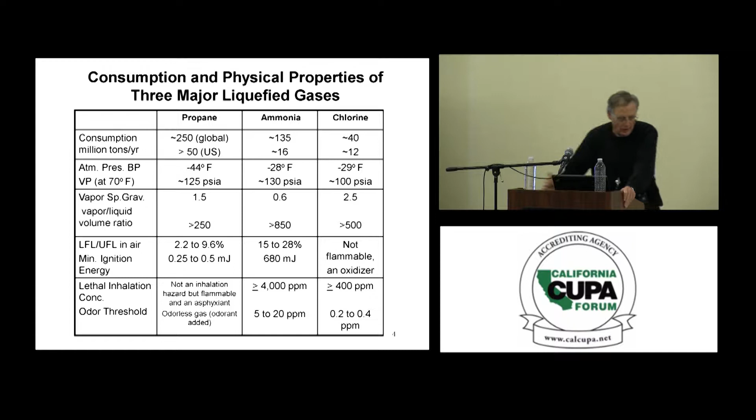The Chlorine Institute is a very good example of an organization that provides a lot of very good information to first responders, to chlorine users, to system designers. And I want to encourage you to go to their website, which I've referenced numerous times in these slides. And I've also shown you that brochure. Now, I don't know if everyone, I think I only had about 25 copies that I picked up from a speech by someone.

I'm going to show you a video that they hand out for chlorine emergencies, an overview for first responders. This is also free from the Chlorine Institute, and I think it's actually distributed through the American Chemistry Council, which the Chlorine Institute falls under. And if someone really wants this badly, I've got a number of these at home, so if you want to come up, if you really want to know more about it and you want to get a copy right today, you can have my copy. I spent a lot of money, it's free.

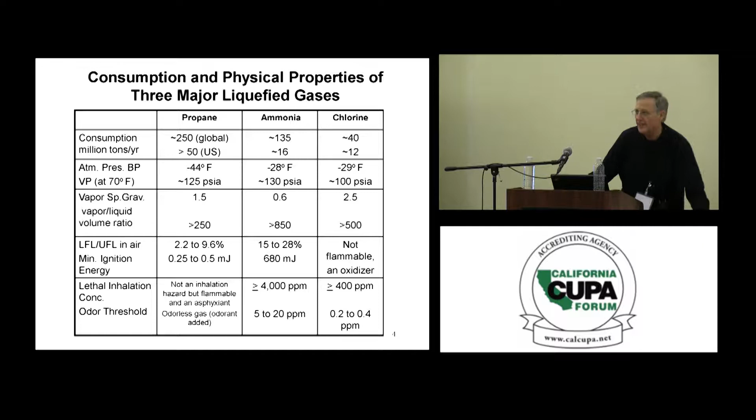Here are some examples of the technical literature. All you have to do is register on the website, download these free as PDF files, and they have a wealth of information about how to install proper piping systems for dry chlorine systems, chlorine vaporizing system, chlorine pipelines, emergency response, first aid, properties, the basics about chlorine.

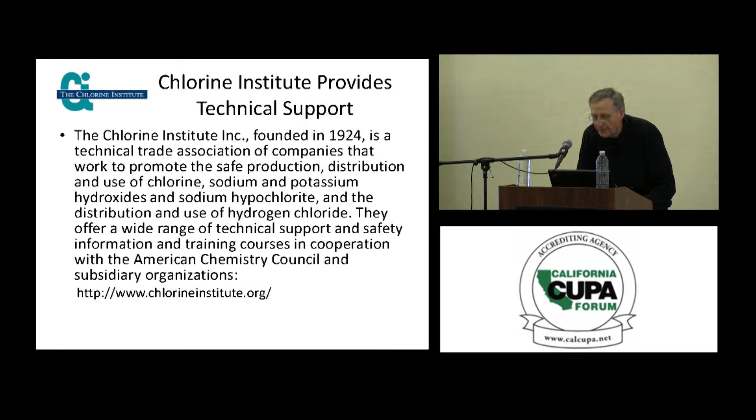There are ones that talk about chlorine scrubbing systems. We're going to talk, one of the examples I give today is about a scrubber that did not work properly. Recommended practices for facilities in terms of how to prevent releases.

And as I mentioned this morning, one of the major roles of chemical engineering when dealing with hazardous materials in process safety is prevention of loss of containment. In your elevator speech, if someone asks you what's the difference between process safety and worker safety, process safety is all about preventing loss of containment through engineering controls and management system processes. And there's a big difference between worker safety and process safety from that respect.

Again, some other things about the Chlorine Institute. The Chlorine Institute also provides information on HCl and anhydrous HCl and on bulk transport and learning from experience events and so forth.

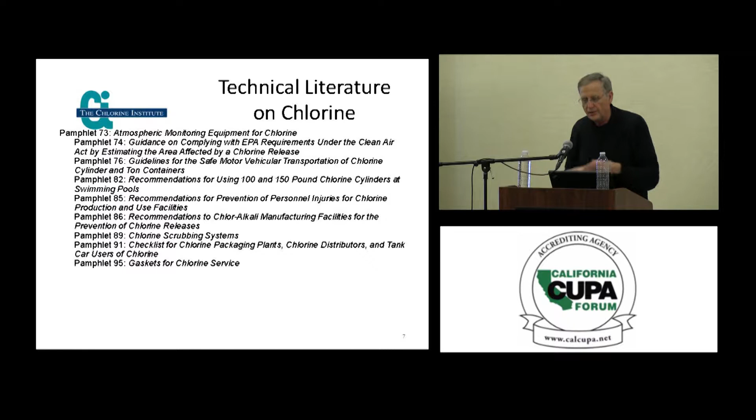So there's a lot of information also for water and wastewater system operators where there's a lot of chlorine used, typically in ton cylinders.

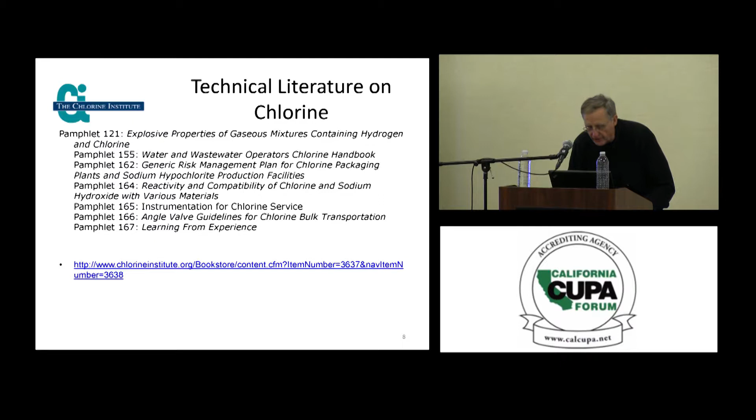So instead of me going over all of this business about properties of chlorine, what I'm going to do is give you an example of what the Chlorine Institute provides on the physical and reactive properties of chlorine.

Chlorine exhibits a very strong, pungent odor that is similar to bleach, but is much stronger. It is easy to detect by sense of smell at very low concentrations.

By itself, chlorine is non-explosive and non-flammable, but it is a strong oxidizing agent that will support combustion with flammable gases and vapors. If chlorine comes in contact with combustible substances, explosions and fires may result.

The most common way for chlorine to come in contact with incompatible substances is through spills, releases, and container failures. Hazardous conditions can also result if chlorine comes in contact with any of these substances. Chlorine reacts readily with many organic chemicals, often violently.

Chlorine reacts with water to form hydrochloric and hypochlorous acid. It is also incompatible with moisture, water, and steam, forming corrosive acids when mixed.

At 483 degrees Fahrenheit, chlorine will oxidize steel, essentially burning it. Chlorine reacts with steel at lower temperatures under certain conditions. Oxidation could lead to a fire, which should be avoided since water cannot be used on a chlorine fire.

Chlorine exists as a gas or a liquid. This chart compares the properties of chlorine gas and liquid. Again, it is important to remember that gaseous chlorine is heavier than air, so it will settle in low areas such as basements, creek beds, and ravines.

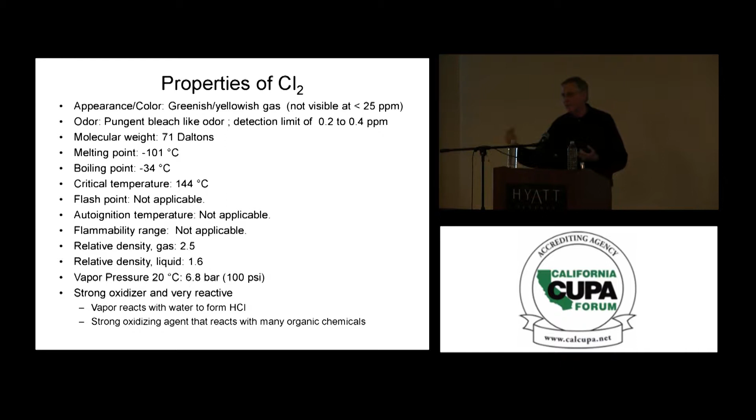So what was the rule of thumb in terms of density relative to air for the vapor? The ratio of molecular weight of the gas to the average molecular weight of air, which is roughly 29.

71 over 29 is about 2.5. So that's a good rule of thumb to remember.

Now, another important point. One of the reasons that chlorine has such great commercial value,

not only because of its chemical properties, but because of the physical property that's shown right there.

Again, for those of you who weren't here this morning, there are certain gases that cannot exist as a liquid at room temperature. And that's because that is above their critical temperature.

Now, chlorine has a critical temperature of 144 C. It's pretty high.

So that means that when you've got a tank car or tank, this is what's inside. A tank's under pressure. It's at 70, 80 degrees Fahrenheit.

It is there as a gas, as a liquefied gas. And that has some advantages in terms of transportation because it's a very dense phase.

Also, it presents some challenges in terms of the hazards, because what happens with a liquefied gas when you suddenly release the pressure?

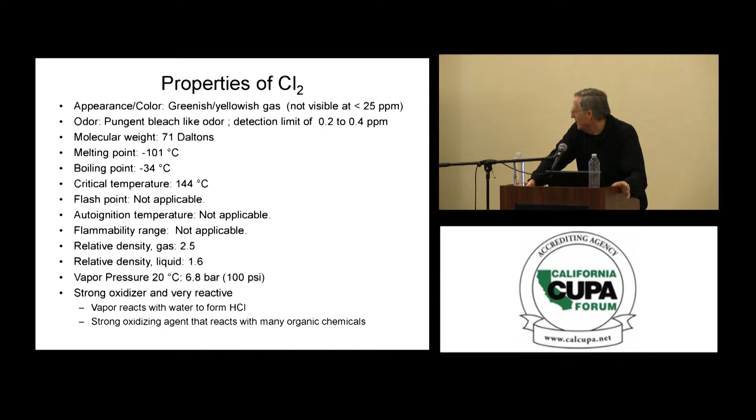It expands rapidly, a very rapid phase transition, and that leads to the condition that's called a BLEVE, boiling liquid expanding vapor explosion. So we're going to talk about that too.

Now, vapor pressure versus temperature. When you have a liquefied gas, if you know the temperature, if you've got that gas container and if the

pressure gauge isn't working, just knowing the temperature, that's all you have to know. And then you look at the vapor pressure versus temperature relationship and you will know what the pressure in that

vessel is. Because for a pure liquid, at any given temperature, it is going to exhibit a certain vapor pressure above the liquid solution.

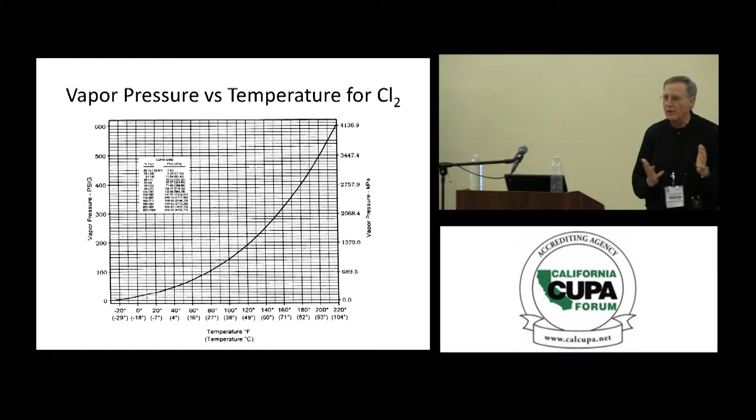Vice versa, if you know what the pressure is, you're going to know what the temperature is, assuming it's in equilibrium. And this has some importance in terms of emergency response at times.

Now, effects from chlorine exposure. Exposure to 1 to 3 parts per million provides mild irritation of the nose and throat and so forth, and the reason for that is it reacts with water and forms hypochlorous acid and hydrochloric acid.

Very corrosive. We're going to be talking about ammonia later. There's an order of magnitude, a factor of 10 difference in terms of lethal concentration between chlorine and ammonia. Chlorine has a lethal concentration - if you get up into the hundreds of parts per million, roughly 400 parts per million, short-term exposure, you will be dead in a very short period of time.

The death is a result of primarily pulmonary edema, but you'll also have other effects as well. As you go up, headache and throat irritation occur at concentrations of 5 to 15 parts per million, and 30 parts per million produces immediate chest pain and so forth.

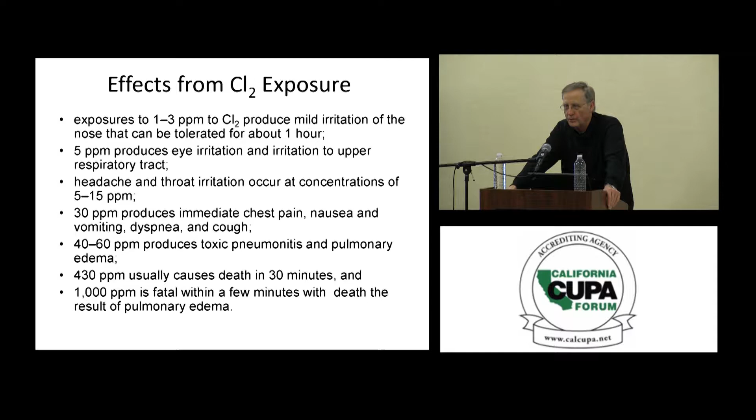So once there's a release, the concentrations can go very high short distances from ammonia or chlorine releases - we're talking about 40, 50,000, 100,000 parts per million. So those are well above the lethal concentration level. So if you get into a cloud, it can be the last thing you will ever do. It's a very serious situation.

Someone want to explain to the rest of the crowd here how IDLHs were developed? Does anyone know the reason for them and the rationale? Are you going to keel over immediately if you're exposed to that level? Close - yeah, that's right.

And so this says immediately dangerous to life and health. This does not mean you are going to die from exposure to that level, but it means you're going to be real uncomfortable, and it will limit your ability to escape, especially with things like chlorine and ammonia that affect your eyesight because of tearing, your ability to breathe, coughing, and respiratory distress. But you will be able to escape at these levels.

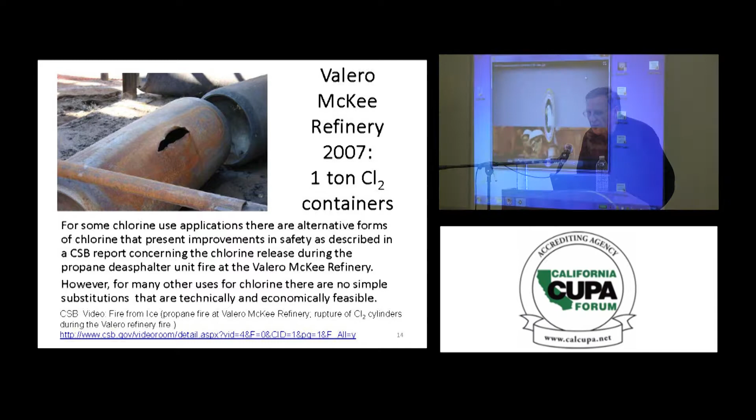And we're going to go 9 minutes in. I had it set to the right spot, but it's not there, but I know where the right spot is.

On February 16, 2007, a massive fire broke out in the propane deasphalting unit at the Valero McKee refinery near the town of Sunray in the Texas Panhandle. 3 workers, including a contractor, suffered serious burns. 11 others received minor injuries.

The fire occurred after liquid propane was released from process piping, leading to fire protection guidance requiring the use of remotely operated shutoff valves and more extensive fireproofing of structural support steel near refinery process units where jet fires can occur.

Valero used chlorine as a biocide to kill bacteria in cooling water. This chlorine was stored in a hazardous area where it was exposed to the threat of fire. Refineries don't have to use chlorine. There are inherently safer chemicals, such as bleach, that can be used for this purpose.

Three one-ton chlorine containers were in a shed only about 100 feet from the deasphalting unit. The intense heat ruptured one of the containers and melted the fusible plugs on all three, causing a release of chlorine. Valero reported that more than 5,300 pounds of chlorine were released to the atmosphere. The toxic gas could have presented a serious threat to responders had they not been evacuated earlier.

A second catastrophe could also have occurred.

Now, it would be nice if there were an easy solution to eliminate elemental chlorine use and use a less hazardous form of chlorine. While that is possible in the case of using chlorine as a biocide—to essentially react chlorine with sodium hydroxide in aqueous solution to produce a solution of sodium hypochlorite, the bleach form—you can't do that in many cases. So it's not an option from a risk management standpoint to eliminate the use of elemental chlorine. So we've got to deal with the hazard.

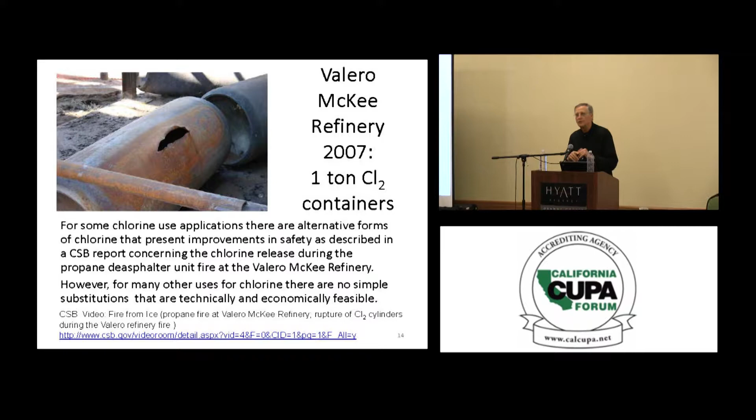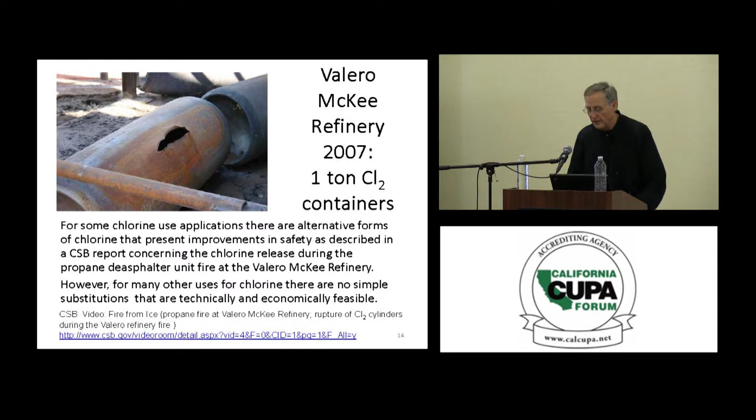We've got to keep that chlorine in the tank car, in the pipeline, in the process, and prevent it from getting out and exposing workers and members of the public.

So how is chlorine transported? Chlorine is a very large volume product transported around the U.S. and used in quantities on the order of 12 million tons per year.

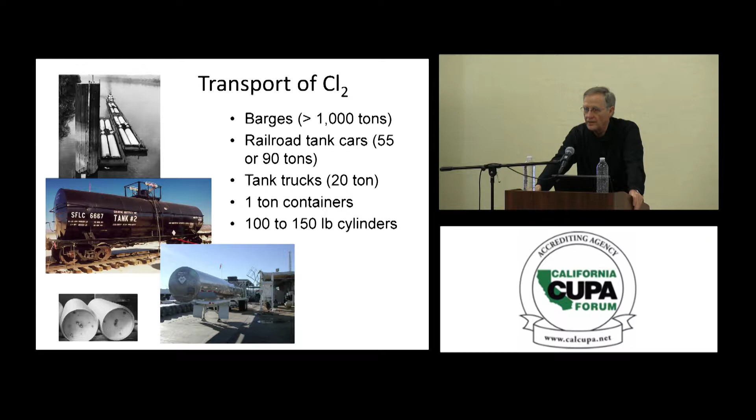Railroad tank cars are a primary method for moving chlorine around the U.S., in 55 or 90-ton tank car loads. Tank trucks also move chlorine, though much less, in up to 20-ton cargo shipments. One-ton containers, as was shown in the McKee refinery fire, and then 100 to 150-pound compressed gas cylinders.

And in those compressed gas cylinders, as in all these cases, it's transported as a liquefied gas.

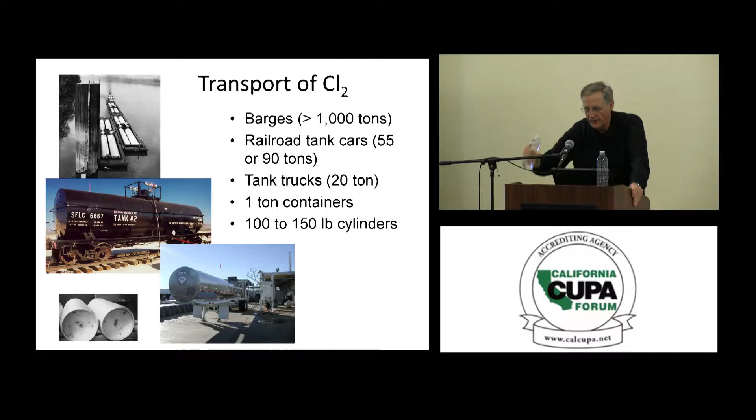So what's the Chlorine Institute say about the industry's safety record for chlorine transport? Well, they say it's been pretty good, and that rail transport is one of the safest modes of chlorine transport. Some 3 million tons of chlorine are shipped by rail annually, typically in 90-ton tank cars. This amounts to over 30,000 tank car shipments a year.

Of more than 1.5 million chlorine tank car shipments since '65, there have only been 11 breaches of tank cars—incidents where chlorine escaped into the air because of damage from an accident. I don't think that includes the minor leaks that occur at the tops of the tanks with the valves. These are very large breaches.

Overall, accident rates for rail shipments of all hazardous materials, including chlorine, have declined 88% since 1980. And remember, I talked to you this morning about some of the changes put in place after the BLEVE incident at the site in Arizona with the propane tank, with the top and bottom shelves on the couplers, and the insulation on both ends of the car having shields essentially welded in place to prevent penetration of the ends of the tank car.

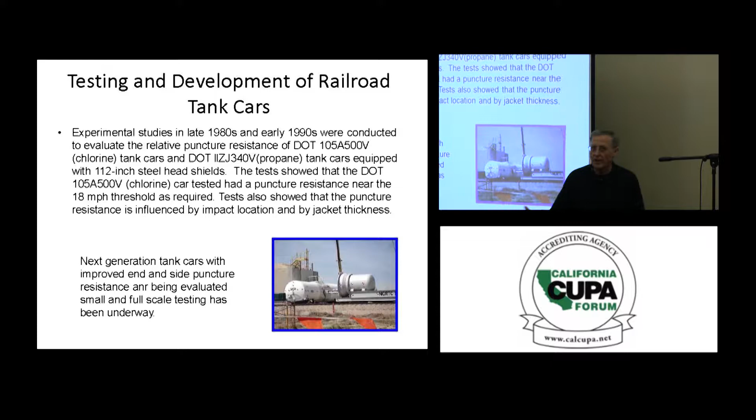As I mentioned, one of the things that happened after some BLEVEs with propane tanks was putting shields on the ends, the front and back ends of tank cars. But what if you have a side impact? If you have a derailment and cars flying all over—I'll show you in the ammonia discussion such an accident—you can still get side penetration. So there's work underway looking at how to improve overall performance.

Studies done in the late 80s and early 90s showed that many of these tanks can survive accidents where there may be a decoupling and penetration of one of the couplers through the insulation, but they can still survive at 18, 20 miles per hour. Higher than that, maybe they won't. So they're looking at how to better design these tank cars.

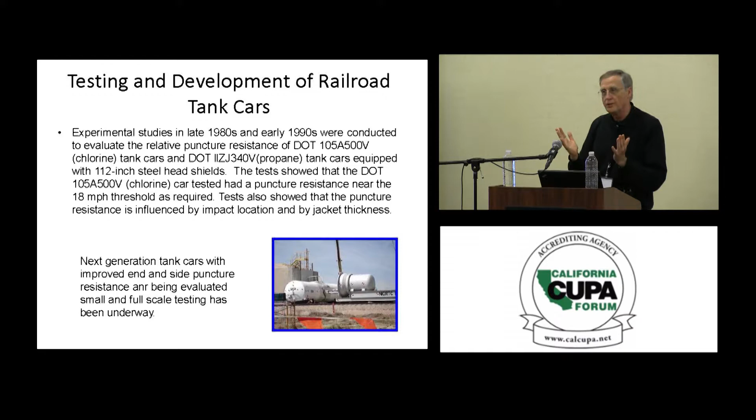Now, will that be a quick fix? What's the lifetime of a tank car? These tank cars aren't automatically replaced when a new standard's put into place. So it takes years to often turn over the inventory of what's out there running across the rails. We've had some big improvements in the last 30 to 40 years in terms of BLEVE incidents, but there's still some improvements, and people are working on these kinds of issues.

So let's talk about in the supply chain—we're going to be talking about from production through distribution, distribution centers and so forth. Where do accidents occur? One large release happened in Henderson, Nevada in 1991 at a chlorine production facility run by Pioneer Chlor-Alkali. At this incident, they released roughly 70 tons of chlorine, which is equivalent to what is typically in a railroad tank car. This happened in May of 1991.

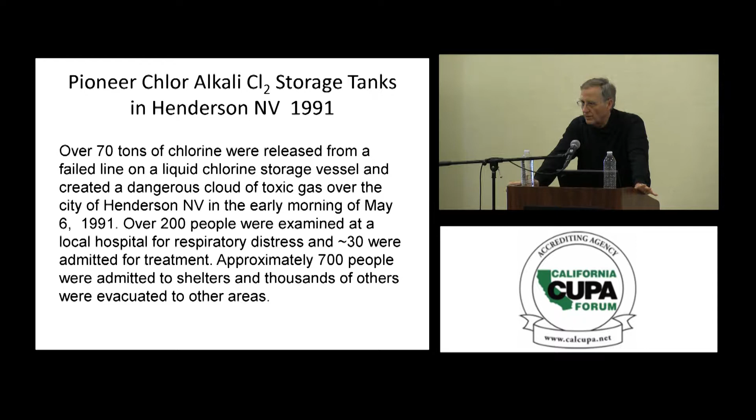There were quite a few people who went to hospitals. 30 were admitted for treatment. Luckily, no one was seriously injured and no one died from this event.

At the facility, they had 8 150-ton storage tanks, and what happened was they had a line leading from a tank going to a pump that was used to fill railroad cars. In other words, this was a production site. They produced chlorine, these tanks were used to store product, and then they would fill rail cars and ship rail cars out. This was probably the source of chlorine for much of Southern California, I would guess.

There were a number of issues with this in terms of how the employees assessed the situation, how quickly they responded, and how they notified the authorities and interacted with them in addressing the issues. They very much underestimated the severity of the situation, and it got out of control. They thought they had it under control several times, and they probably did not have a good mechanical integrity program. They did not have good emergency planning.

They weren't prepared to deal with the issues they should have been able to deal with in a much more effective manner, and shut down the flow before it got to the situation where, over a period of 24 hours, they lost 70 tons of material.

Now, what could the consequences from a 70-ton chlorine gas release be in a metropolitan area? There have been numerous studies done, with numbers anywhere from 10,000 to over 100,000 fatalities. This is real serious—it could be a major catastrophe.

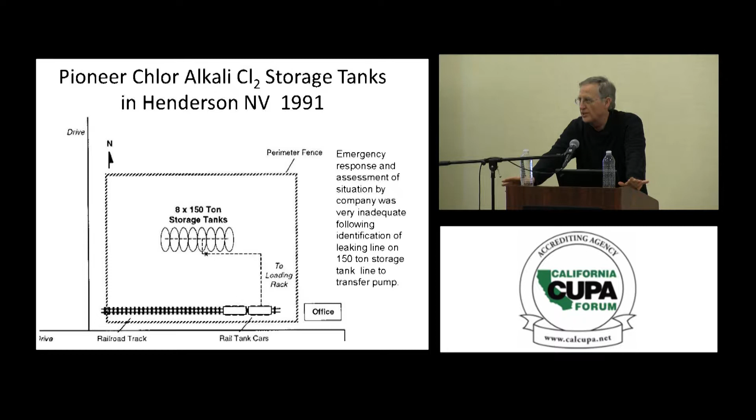Railway tank cars carrying 70, 90 tons of chlorine can potentially have those kinds of consequences. That's why I want to come and talk about these issues, so we never become complacent with these kinds of hazards. As a society, as an industry, as a chemical industry, we have a very good record in managing these risks. It's not perfect, and we need to continue to try to get better.

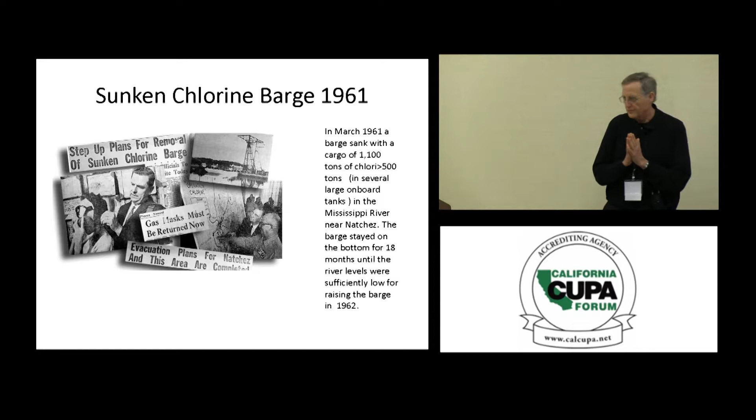Finally the President ordered the Corps of Engineers to work with a number of other groups, and they raised this barge successfully. During this whole process, they provided the public with something like 8,000 or 10,000 gas masks in case these tanks failed when they were removing the chlorine from the barges. So again, this is a success story in that these tanks survived the sinking, the raising of the barge, and then unloading. Good engineering design. Or were they lucky? Hopefully it was good engineering design.

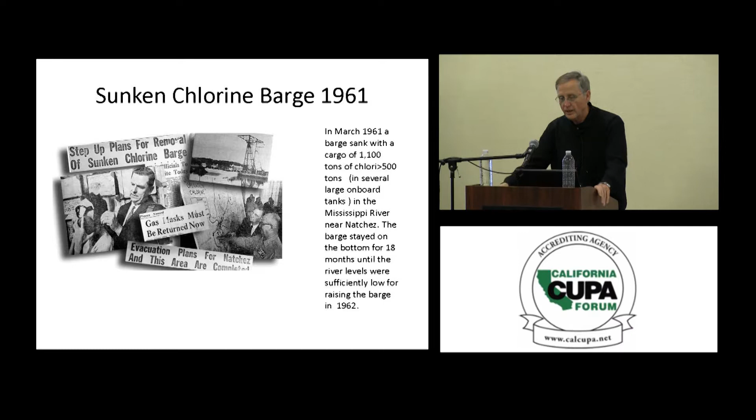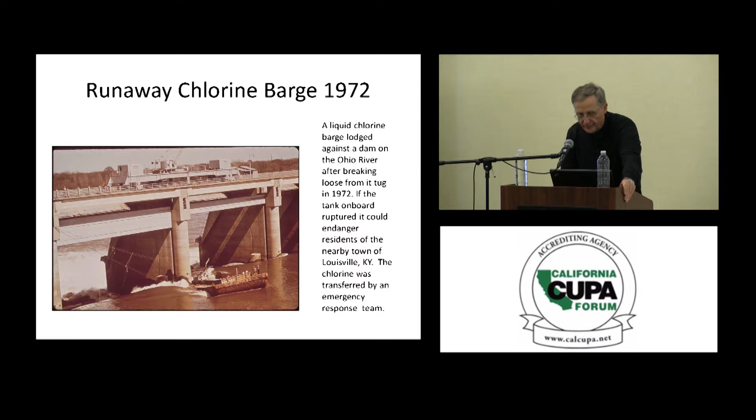2004, Macdona, Texas, June 28th. Head-on collision of two trains resulted in a chlorine tank car breach. Three persons, including the conductor of the UP train and two local residents, died as a result of chlorine gas inhalation. We've got to keep it in the tank. Loss of containment.

The National Transportation Safety Board determined that the probable cause of the June 28, 2004 collision of the Union Pacific Railroad train with this other BNSF railway train was train crew fatigue that resulted in the failure of the engineer and conductor to appropriately respond to the wayside signals governing movement of their train.

Now, in the discussion we had this morning of the propane incident in Italy at night, remember what I said when they did the modeling after the incident? From the time the collision occurred and the derailment until the explosions occurred, 90 seconds of time, and 30 people were dead.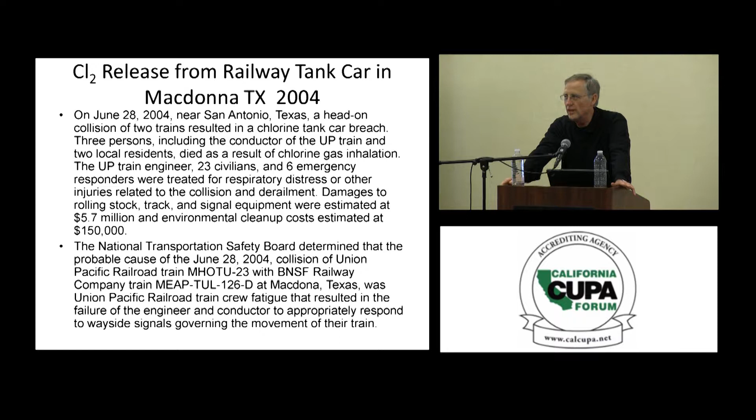There's not much time to react, so there are two types of safeguards we talked about: preventive and mitigative. Preventive safeguards, typically engineering controls, are intended to lower the probability of release. Mitigative safeguards are intended to reduce the severity of consequences. In these kinds of transportation accidents, we don't always have a lot of time, depending on where it happens, to mitigate. So prevention is what we've got to focus on.

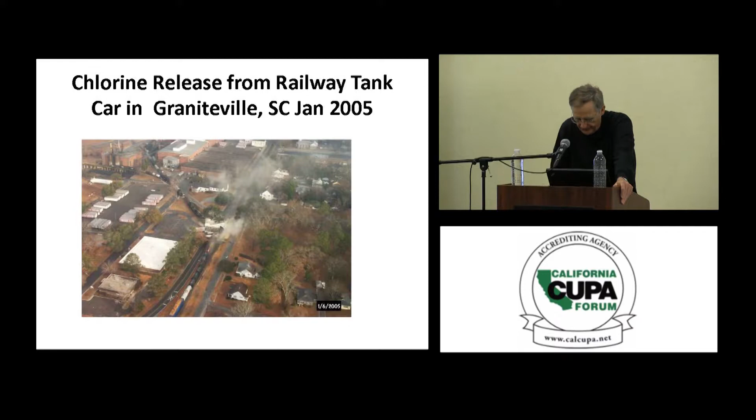Graniteville, South Carolina, January 2005. A misplaced track switch resulted in a collision between a railroad tanker carrying chlorine and another parked train. One of three derailed chlorine tank cars ruptured, venting 90 tons of chlorine gas. 41 were hospitalized, 9 fatalities. We're lucky it was only 9. Could have been 9,000.

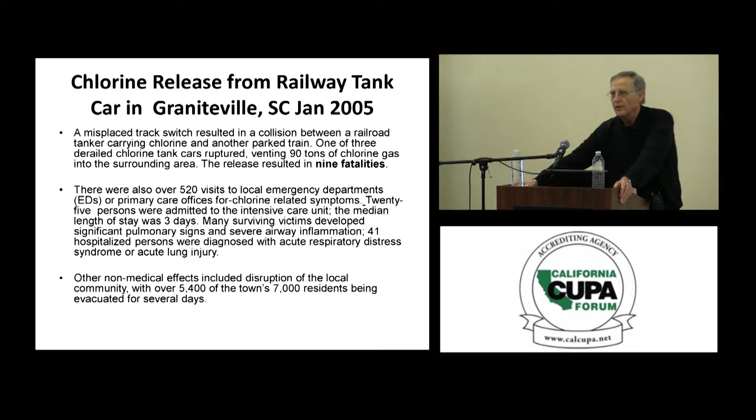Many surviving victims developed significant pulmonary signs and severe airway inflammation. 41 people were hospitalized with acute respiratory distress syndrome. I'm not certain in this case what that extent means, but acute respiratory distress syndrome usually means you go on a mechanical respirator for 24 to 48 hours, and if you make it that far, you may survive. But this is a very serious type of event when these happen.

Close call, August 2007. Operator error caused a Union Pacific tanker car full of chlorine, probably 70 to 90 tons, to escape from the Arden train yard near Las Vegas. Although no toxic gas was released, the tanker car traveled 20 miles on its own through densely populated areas before railroad workers and police were able to stop it.

Based on prior estimates by the University of Nevada and numerous other groups, I've seen these numbers ranging anywhere from 10s of thousands to 100,000 could have died.

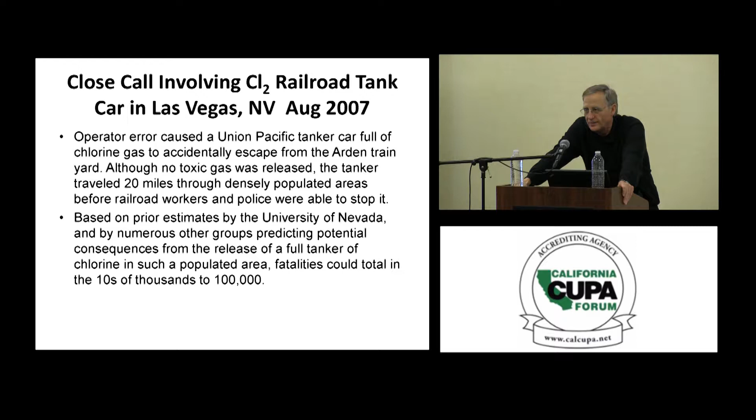Now, this isn't a transportation accident. This happened after the tank car got to the siding. In the case of chlorine transport and use, many facilities that utilize chlorine on site may use the tank car as their storage tank, or they may keep multiple cars there for some period of time in their inventory. DPC Enterprises in Festus, Missouri had this incident in August of 2002.

This morning I talked about the four steps in a risk management business process. The first step is identifying the hazards and knowing what hazards you have. The second is to evaluate those hazards in terms of consequence analysis and probability of events, to come up with some risk rating. Based on that risk rating, you take actions in terms of implementing risk controls. That's the third step. If you're then satisfied that the risks are tolerable, you implement and maintain those controls.

If you're not satisfied, you iterate back, look at other control options, and once you're finally satisfied, then you go and operate the facility.

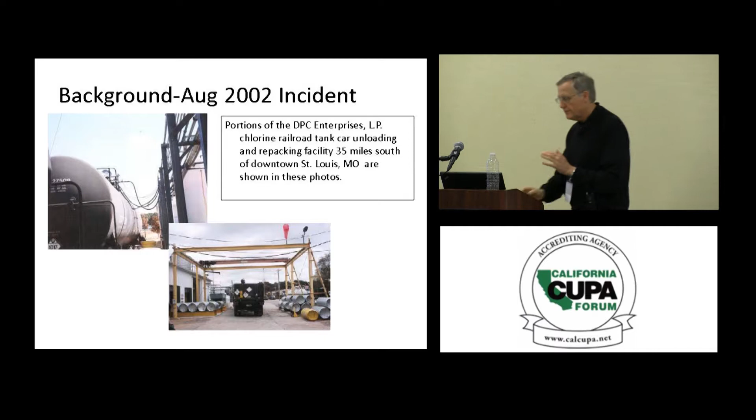So these folks had some level of appreciation for the hazards they were dealing with, but they probably weren't real savvy. It's a 1-shift operation, typically running from 6 a.m. to 4 p.m. Monday through Friday.

This was located 35 miles from St. Louis. One of the fellows I teach this process safety course with was at the time the lead investigator for the Chemical Safety Board and actually did this investigation, so he's told me this story many times.

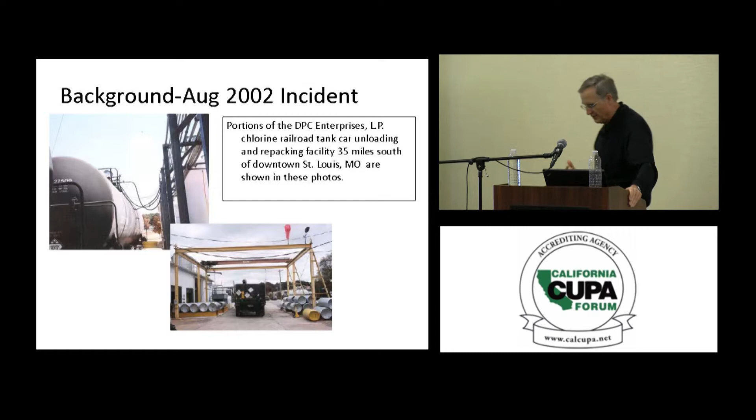DPC had learned from past events. One of the things we talk about, learning from experience, is one of the key elements within a management system. Again, these folks had that part right.

They said, gee, there have been a lot of other companies in the chlorine business who have had accidental releases. So we're going to put some safeguards in place so that if we have a release, or a failure of one of our flexible hoses, or an accidental decoupling of our fittings for the transfer, we're going to be able to automatically shut down. We'll lose a little chlorine, but it's not going to be a big deal.

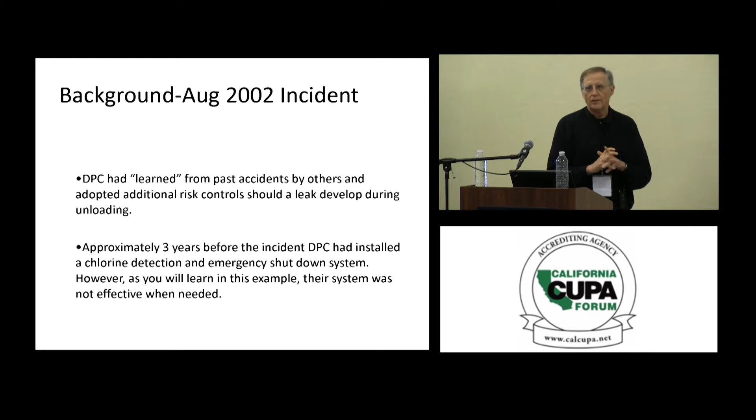So they went along and thought everything's great. We've got all the controls in place.

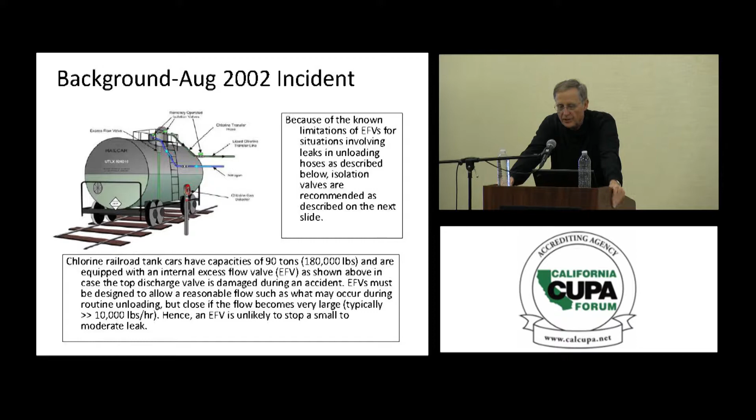Now, what they had done, because of the known limitations of emergency flow control valves for situations involving leaks in unloading hoses—excess flow valves is what I meant, excuse me, I said emergency, it's excess flow valves.

Tankers that carry hazardous materials like chlorine, propane, or ammonia have internal valves that, if the flow rate reaches a certain level, will automatically shut, or at least close to a very low flow level. However, they have to be triggered.

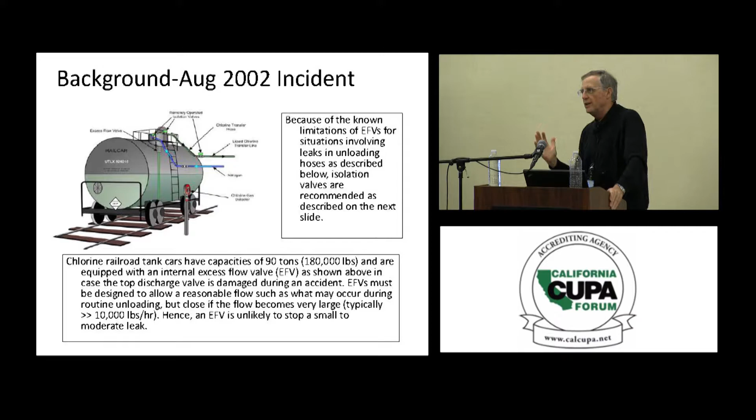In the incident I described with the video this morning, in Iowa, for that 18,000 gallon propane tank, they had piping connected to the outlet protected by this excess flow valve that restricted the flow so that it would not close the excess flow valve. So you cannot depend on these excess flow valves.

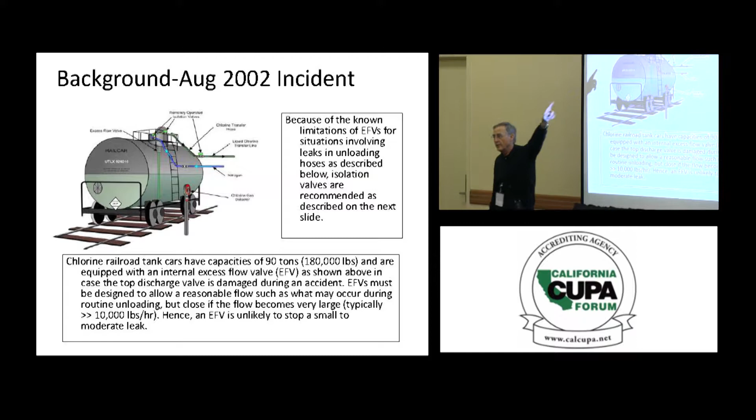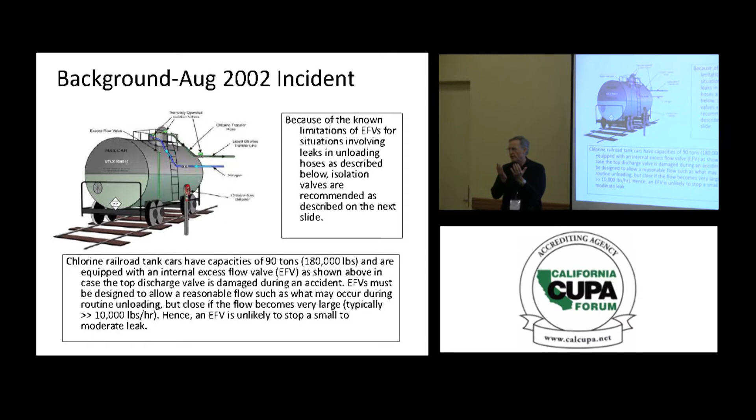What these are designed to do is: if you have a rollover incident with a transport tank like this, you've got this shield on top that protects the external valve, and under that valve is a second valve. So this is engineered with double jeopardy—you lose the top valve, you've got another valve, so you'll start getting flow, it'll be high flow, and this other valve will automatically shut. But it has to be a high flow in order for it to work.

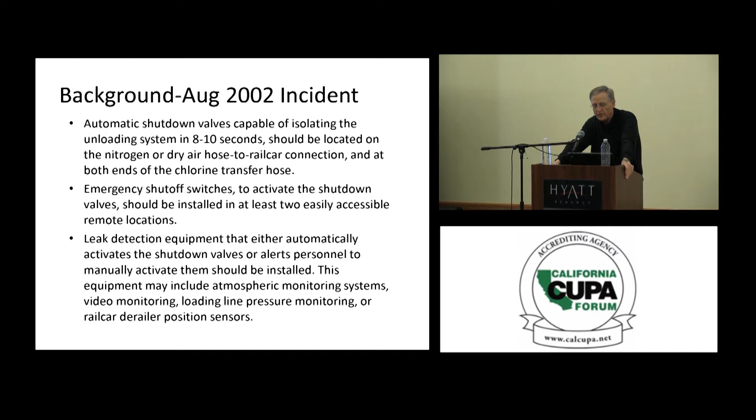So what did they do? They had this automatic shutdown capable of isolating the unloading system in 8 to 10 seconds. Emergency shutoff switches to activate the shutoff valves should be installed at least at 2 easily accessible remote locations, and leak detection equipment that either automatically activates the shutdown or alerts personnel to manually do it. So they had all this in place.

They also had transfer hoses. These transfer hoses were braided metal layer over a Teflon inner liner with a spiral high-density polyethylene guard. Although hoses with non-metallic cores, such as Teflon, are more tolerant of moisture, they are subject to permeation by chlorine.

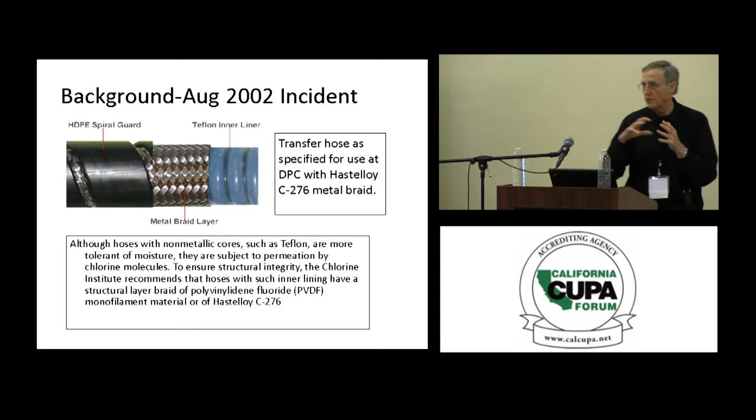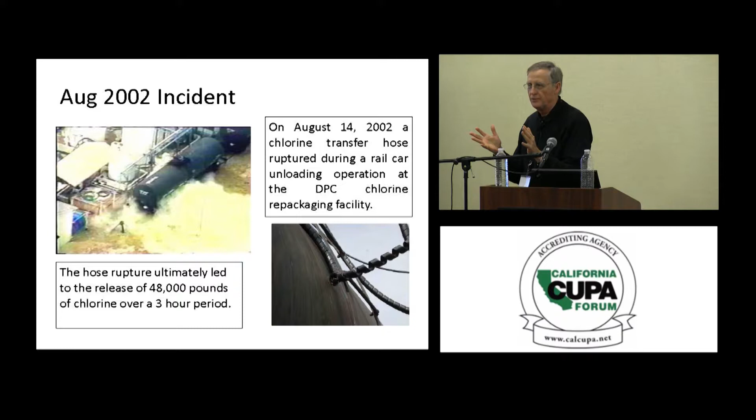Now, what actually happened? One of these hoses failed. The automatic shutoff was supposed to shut this down within 8 to 10 seconds—they should have lost only pounds, tens of pounds, of chlorine in this release. Instead, they released 48,000 pounds over 3 hours. How did this happen?

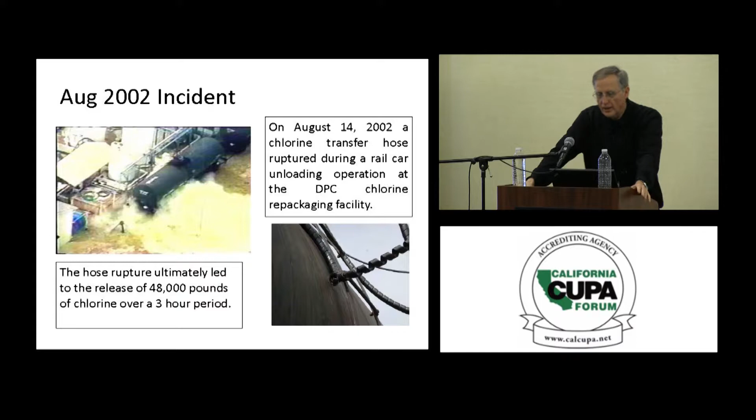The release affected hundreds of other nearby residents, and the community was advised to shelter in place. Luckily, this was in a relatively low-density inhabitation area. Traffic was halted on Interstate 55 for an hour and a half, which pleased a lot of people. And 3 workers and 63 residents had to seek medical treatment for minor injuries, but they were luckily minor.

During the initial response to the release, there was considerable confusion. Plant staff did not have instruction and mechanisms for community notification. It was chaos, and local emergency response personnel were not prepared for an incident of this magnitude.

Remember, one of the things I mentioned this morning that is not under OSHA PSM or EPA RMP plans is stakeholder outreach. If you are an operator, it is your responsibility to have community outreach, to make certain that first responders know what the magnitude of the hazard is at your site and how to respond to that emergency in cooperation with you as the owner-operator. It is also the responsibility of you and the regulatory community to understand these things, and if they do not volunteer, that you go out and work with them to make certain that you understand what these hazards are.

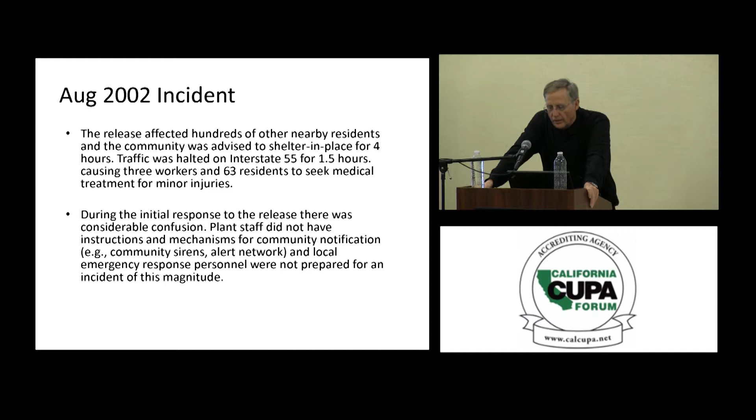Turns out that with these braided hoses, investigators determined that although the hose manufacturer's records and the hose ID tag indicated that the metal braid on the failed hose was made of the specified material, Hastelloy C, it was actually made of stainless steel, which looked exactly the same. So this was a manufacturer's error in terms of quality control, and there was no internal control to make certain that the material as received met specifications.

And I'm guessing that none of the 8 or 12 employees at this site even knew the difference between Hastelloy C and stainless steel, and probably furthermore didn't even know that there was a standard for what they should be installing with that hose.

Should they have known something about that? Yes, they should have. Should the corporation have had a quality control system in place? Absolutely, they should have.

What would that quality control process be if the hose that they received was marked as being made in Hastelloy? Should they test the metal in all their hoses, or what is their process? What would that process be? It would have to be put back, the responsibility would have to be put back on the original supplier.

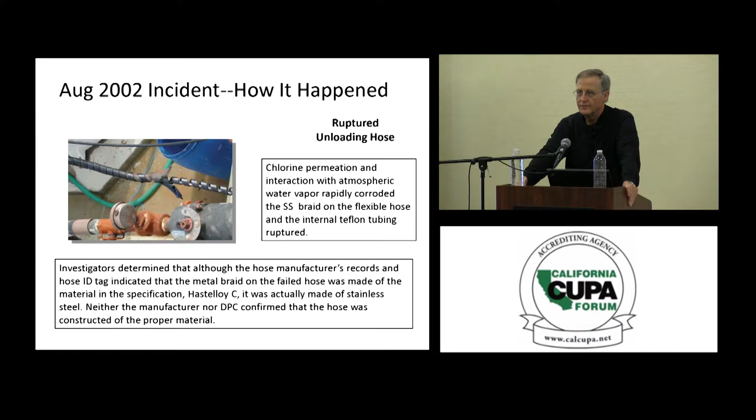I'm not going to go into the details of exactly how this failed. There's a lot of engineering details why there were other problems with this system.

Now, on the day of the incident, even though the chlorine detectors detected the release and the operators pushed the shutdown button, so they had been trained on doing that. My colleague, who actually did the investigation, went out and asked the operators, do you do routine checks on the system? Oh yes, we do it all the time. How do you do those checks? Well, we push the button and listen for the solenoid. Well, the solenoid was actuating, but it wasn't moving the valve mechanism.

So what they were doing, remember I said there's a 4-step process, the last one in mechanical integrity is doing inspections, testing, calibration, and maintenance to make certain that safety critical systems, including those for emergency shutdown, work as designed and specified. So again, they were doing it partially right. They'd put in controls, they were testing them, but their testing was faulty. They weren't actually verifying that they were working. They thought they were working, they were not.

So we had lack of quality control, we had a lack of effective inspections, lack of adequate testing and maintenance by DPC on chlorine transfer shutdown control valves to ensure that the systems worked. Now in the next segment, a very similar system to this in France on an ammonia system also failed for a different reason. We'll talk about that in the next couple hours.

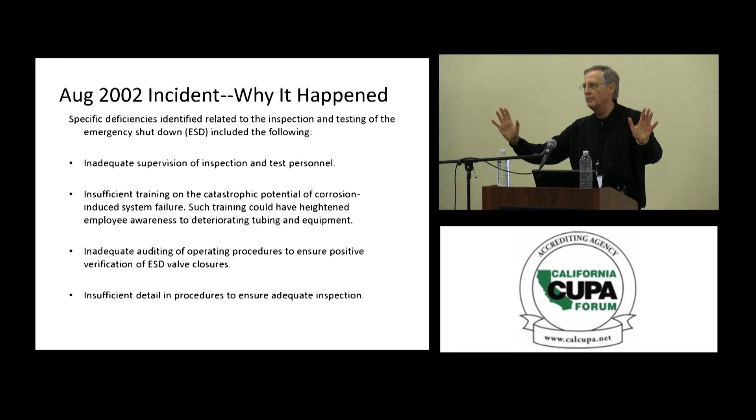Failure of a hose, right? Same thing, flexible hose connected to 1-ton phosgene cylinders. They had a maintenance requirement as part of their management system for process safety. And here is a company that I personally have held on a pedestal for years and still do, as being a great company in terms of process safety. But even a company as responsible, as competent, with as good a track record as DuPont has, had a fatal accident with phosgene because of failure of a management system.

Go to the Chemical Safety Board website, and there's a video on this incident that talks about the failure of this hose. This hose was supposed to be replaced on a monthly basis. They switched from Maximo to some other management system and maintenance. They switched over, and the hose had not been replaced for 7 months. It was a situation where they'd also looked at alternative controls and didn't implement them for a variety of reasons. Series of management system failures or deficiencies that led to a fatal exposure.

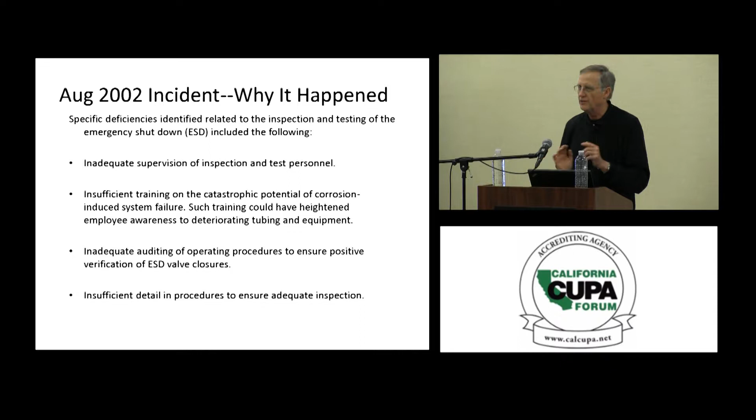Roughly 1 to 2 pounds of phosgene was released, and the fellow who was walking by when that release occurred, he was about 5 to 10 feet away from that hose. Just by chance happened to be there.

With phosgene, chlorine's not exactly as phosgene. The impact and the consequences may not be well exhibited for 3 or 4 hours. So he appeared to be fine initially. 4 hours later, started to suffer from severe fluid in the lungs, and he was dead in 24 hours.

So these are some of the issues. And again, for those of you who weren't here, OSHA process safety management standards for management systems requires the owner's process knowledge. They call it process information. In this list of 20 elements under risk-based process safety, we like to call it process knowledge. To convert process information by having process safety competency into process knowledge, to make knowledgeable decisions about risk.

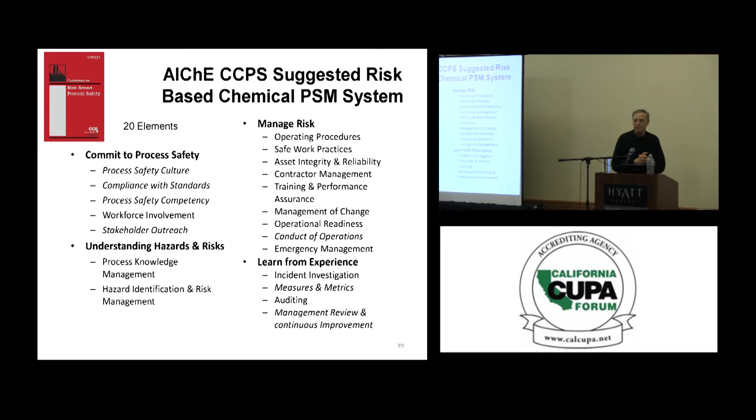They also, asset integrity and reliability, training, compliance with standards, and making certain that if you had an internal standard to have a Hastelloy jacketed hose, that you in fact have Hastelloy jacketed hoses. And when you look at what are the costs, is it expensive, is it time consuming, is it a pain in the neck or worse, to do that, yes it is. But it's a lot less of a pain than to deal with a 24-ton release of chlorine gas or a release of a couple of pounds of phosgene that can kill someone.

Chlorine release, another DPC facility in Glendale, Arizona in 2003. Release of chlorine from a scrubber that had insufficient caustic. 5 local residents and 11 policemen treated and released for exposure. Luckily, no one was killed.

Now, this is an example of lack of process safety competency on the behalf of the corporation, not having adequate management systems in place, not doing adequate hazard identification, not fully understanding the process in terms of potential consequences. They had not done an adequate analysis when they did hazard identification and risk management of looking at what the potential consequences are.

Remember when we talked about, at the earlier session, about propane, those releases and other types of hydrocarbon fuels, and when you look at consequences, are we going to have a jet fire? Are we going to have a vapor cloud explosion? Are we going to have a release of multi-phase and have a fireball? What kind of fire scenario do we have to plan for? In this case, they did not do this kind of analysis for what might happen.

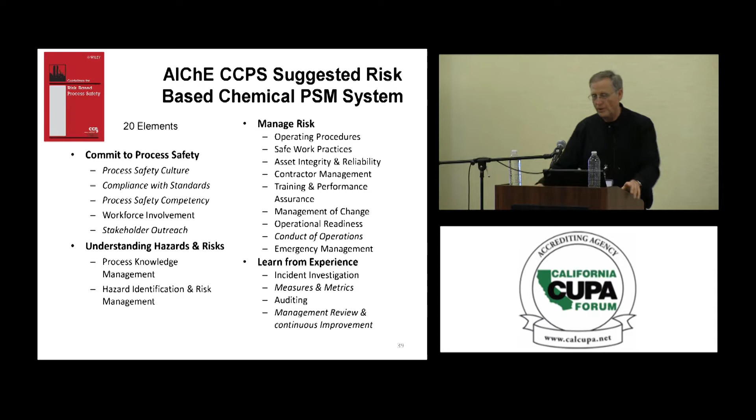So they were going along and they were making a bulk transfer. And on an infrequent basis, they would fill bulk trailers, these over-the-road trailers, from chlorine tank cars so they could make deliveries. And they would purge the system, the tank truck before starting, or at the end, they would do a purge and put the purge gas through a solution of sodium hydroxide to form bleach. And then they could sell the bleach, and they would not have to emit any chlorine gas.

So they had done a risk assessment, they had looked at the regulations, and they had put in place a system which was good for the environment, would not waste material, they could sell another product, and everything should work fine. However, they had not looked adequately at how should we control this? What can go wrong?

So the CSB concluded that the safeguards provided on this scrubber were not commensurate with the risk. They did not have nearly enough caustic in the system to handle the chlorine. At some point when the chlorine hits the water, it forms HCl. The HCl reacts with the sodium hydroxide, and you get the formation of sodium hypochlorite, and you have a situation that's under control. When you no longer have sodium hydroxide available, what's going to happen with the chlorine? It's going to still react with water. You're going to get HCl vapor emissions, and some chlorine going right through the system. That's exactly what happened. They only had procedural controls, and people involved in these operations who were not adequately trained. It doesn't mean everybody had to have a degree in chemistry or chemical engineering, but they needed to understand why things were done a certain way and what the limitations were. One key requirement is to have safe operating ranges: how much material can we purge from a vessel, how much caustic do we have to have. Totally inadequate in terms of what they provided.

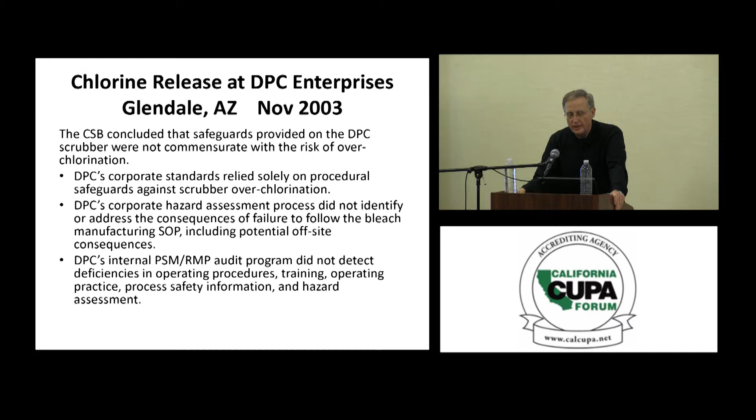More bad news, 2007. Technician error when transferring chlorine from rail car to storage containers in a bleach factory. Over 900 pounds of chlorine gas. Now, most of the accident reports I've seen throughout my career have as the first thing when I read the report, operator error.

And in too many cases, what was the response? Well, how could they have been so stupid? Let's fire the operator and get somebody else. Let's transfer them. Let's give them more training. When the problem was probably back with the engineer who designed the system, or the maintenance department that didn't adequately maintain it, or the person who wrote the operating procedures.

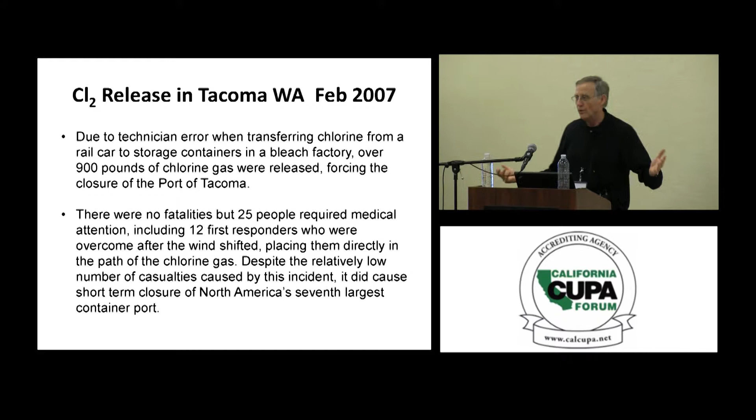We talked about multiple layers of protection and making things foolproof, to have connections where only one type of hose can go to one type of connection if it's critical. As an engineer, when I wrote operating procedures for transferring new technologies into manufacturing, I always got it right. I always had every scenario figured out, every contingency, and the operators listened to every word I said, just like you are today. Their wisdom, these golden nuggets, when they walked out of the training room. They were ready. You can't depend on a single layer. You've got multiple layers of protection.

In this particular case, there were no fatalities. They shut down the port of Tacoma for a number of hours, which was a problem, but luckily it wasn't more serious.

Now we'll move on to oxygen and nitrogen. But maybe before that I should ask, are there any more questions? I did not put together examples of all the many cases where chlorine has been released at water treatment plants, swimming pools, and wastewater treatment plants, because I assume you've heard a lot of those. Those typically are much smaller. I wanted to talk about those situations today where there's a possibility of much larger releases.

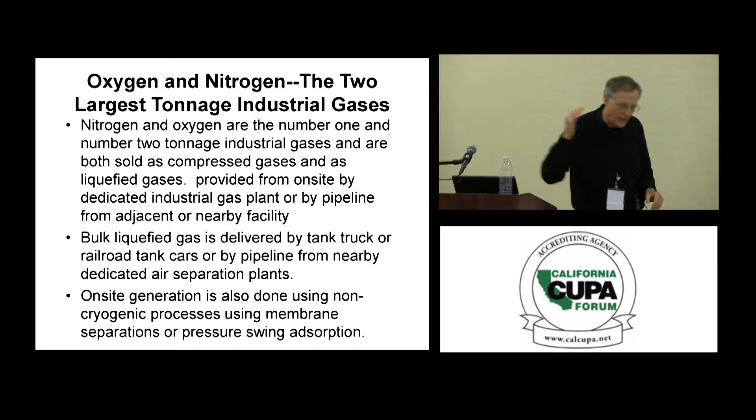For those of you who weren't here to hear this, I want to repeat it again. In most training courses for emergency responders, and I just checked on the website last week and saw this same information from a state fire marshal who said BLEVEs only occur with flammable liquefied gases - that is absolutely not the case. He is absolutely wrong. There is no technical basis for that statement. It is totally incorrect. BLEVEs can occur with many liquefied gases, including water, under high temperature conditions above its boiling point. There was a catastrophic failure of a water-based process in Gramercy, Louisiana in the 1990s at a Kaiser aluminum bauxite ore facility during the middle of the night because they ran at above design operating conditions on pressure. That water-based process, which was filled with a caustic solution, essentially water, that vessel BLEVE'd.

There are many instances in the literature, fortunately not a whole bunch, but there are numerous, where there have been BLEVEs that occurred under non-fire scenarios. So that's another misconception, especially in the fire service, that BLEVEs are, one, restricted to flammable liquefied gases, and two, that BLEVEs occur only under fire scenarios where you have either direct impingement or high levels of radiant heat on a vessel. There are numerous incidents where you can get mechanical damage to a vessel.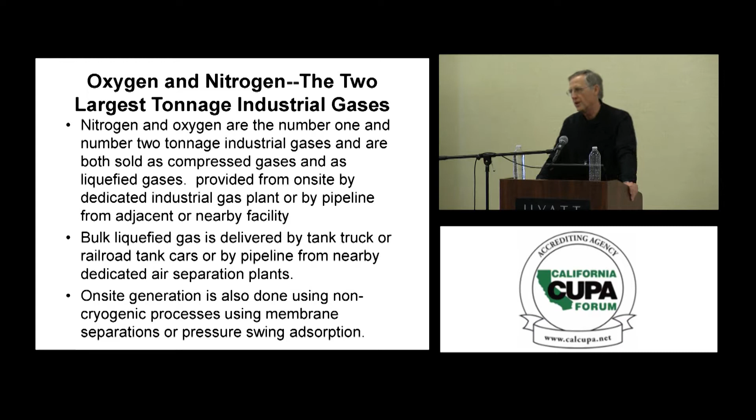There are numerous definitions for cryogens. In the state of California now, cryogen is defined as a liquefied gas at less than minus 90 degrees centigrade. Other codes and standards may make it minus 150 C. Regardless, it's real cold.

When you have oxygen, you can have it in three states: non-compressed gas, compressed gas, or compressed liquid. But it can only be liquefied under cryogenic conditions, because the critical temperature is well below normal room temperature. So you cannot liquefy oxygen or nitrogen at room temperature - it's only under cryogenic conditions.

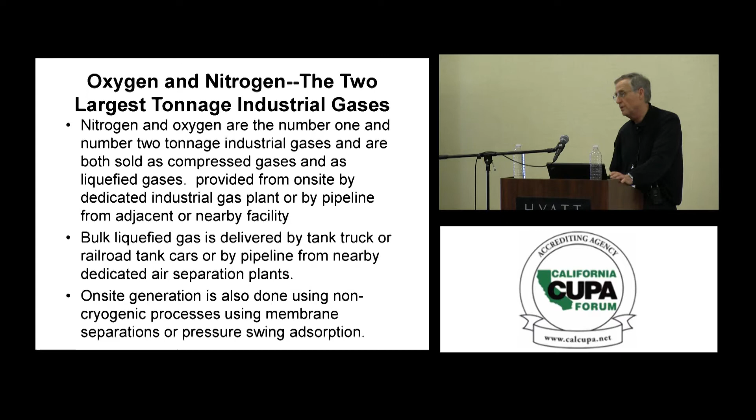But oxygen and nitrogen are both used as liquids, and shipped and used as liquids or as gases. Oxygen is used widely - I give this discussion to a lot of different people in different courses and venues just to make certain these hazards are understood. This one may not apply as much because other than in refining, there aren't as many uses for large tonnages of oxygen industrially in California. Of course, in the medical area, it's the same as everywhere else. So within your jurisdictions, there probably is compressed gas storage of oxygen, as well as liquefied oxygen under cryogenic conditions, in medical facilities, research facilities, and to a lesser extent industrial facilities in California.

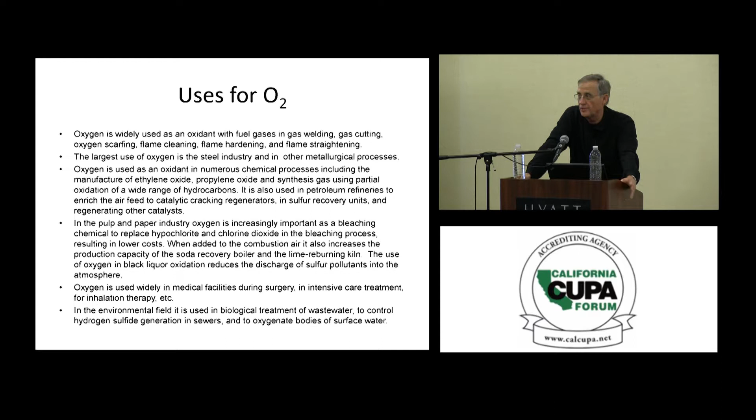Those properties of oxygen: the boiling point of oxygen is minus 297 degrees Fahrenheit. The critical temperature is minus 181.4. So anything above minus 181.4, it can't be a liquid, no matter what pressure you put on it. Relative density to air is pretty close, right, since it's a big constituent in air. And nitrogen, the other major constituent in air, has a molecular weight very close, so it's going to be very close too.

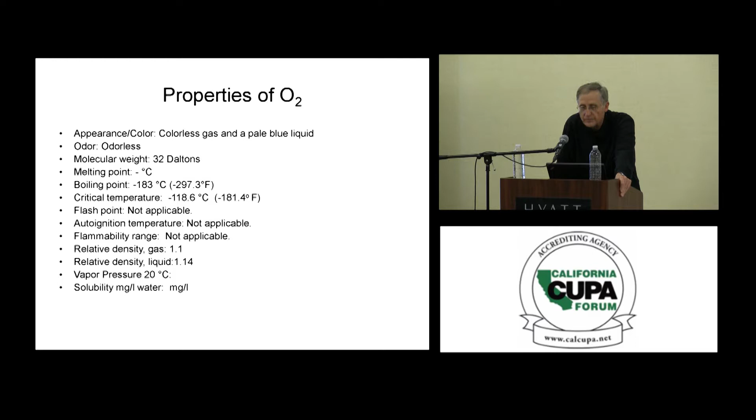Vapor pressure of oxygen - again, I put this curve in so you'll have this. At this point, I did not get a lot of examples of what's gone wrong with oxygen. Cryogenic oxygen, just like many of the situations I talked about this morning with low temperature nitrogen - frostbite - oxygen contacting organics very much accelerates the burning rate. So there can be high hazards associated with liquid oxygen.

So I guess I'd open it up to the floor. If you've got any questions about chlorine or oxygen, I'm happy to try to address them. Or you can take a longer break. What's your choice? You want to talk about anything else on chlorine, oxygen, or anything I said this morning?

Yes, sir - after they test those safety valves, are there requirements? There is, and it depends. I'm supposed to repeat the question: the question is, how often are some of these safety valves tested? These could be pressure relief valves, excess flow valves, or automatic shutoff valves for emergency response, to respond to situations where there may not necessarily be a code requirement. So the answer is, it depends.

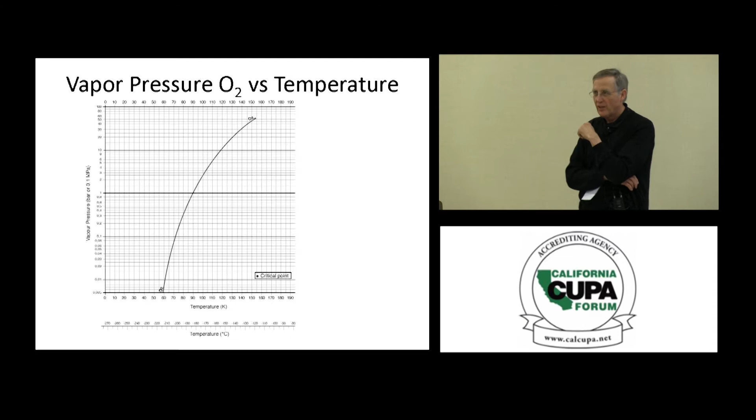I'll tell the story because we have time, and I thought it was pretty funny. At our wastewater plant, a city plant that did change to sodium hypochlorite in the end, they had an incident. Their written procedure was - this was in their manual - that you stand outside the room, take a few deep breaths, hold your breath, run in, and adjust the valves. He didn't quite make it to the door before his automatic breathing response kicked in. He ended up being fine, although he did spend some time in the hospital. And when he got out of the hospital, they wrote him up for unsafe work practice, which eventually, obviously, he got rescinded when he grieved it and brought in the proper directions.

Now, let me make the comment, though, because I was talking about the Chlorine Institute, and I have no involvement with the Chlorine Institute. I have no association, I don't consult for the Chlorine Institute, I'm not involved in any way. And I'm not a proponent for the chlorine industry, but I will say this.

On your hypothetical situation - what would happen and should we change - I'm curious what they did at the facility in your jurisdiction. Did they eventually change? They changed to both, they eventually changed. And then in the other city I regulate, they had a pool with chlorine, and they eventually changed away from liquefied chlorine. They both made the decision that ultimately the risk wasn't worth it, and they planned for it financially.

They're relatively well-off agencies, and they did that. So they went to sodium hypochlorite?

Yeah, a solution. And I'm going to talk about that with ammonia and going to ammonium hydroxide where it's possible. But let me say this, because I've been involved in a number of designs where you have to make a decision: are you going to change, or are you going to put in multiple layers of protection? If you make that decision, the two topics and examples you gave are perfect examples of making something inherently safer.

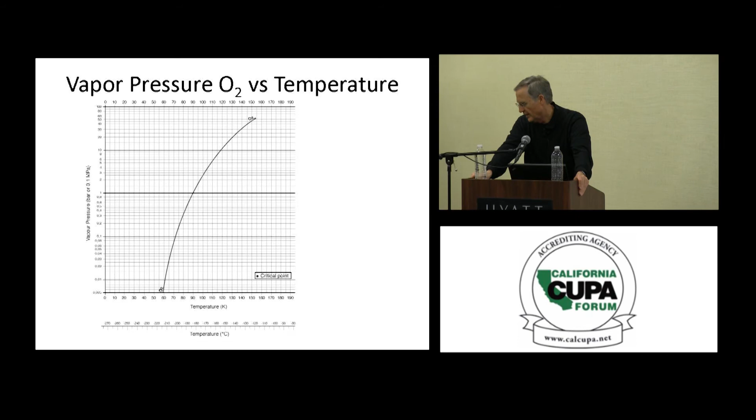There's a fellow by the name of Professor Sandman, who's now retired. He was a professor at one of the universities in the East, Rutgers. And I had him involved as a consultant when I was at a corporation, when I was head of the corporate environmental health and safety and process safety activities.

And we had a very well understood, I think, risk-based decision-making process at the company in doing risk assessments for processes. And we brought him in to help us communicate with external stakeholders on risk communication and what the do's and don'ts and so forth of how to do that communication.

And he told me, he said, as a social scientist, I was so delighted to finally find a field where the data management and analysis is sloppier than in social sciences. And he said, that's risk assessment. And he challenged me because he said, you as an engineer, you've got all of your engineers doing all of these risk assessments, and I will challenge you to estimate the risk equation more accurately than I can in terms of some of the factors.

And he said, your risk equation is this: your risk score is equal to some probability number times some consequence or severity factor. So it was a 2-by-2 matrix. And he said, I always add the outrage factor. So the risk that's perceived by you as an engineer and all of your scientific colleagues is probability factor times severity factor, and you have forgotten the outrage factor, which as a social scientist, I can estimate much more accurately than you can estimate that probability of event factor. And he was absolutely right.

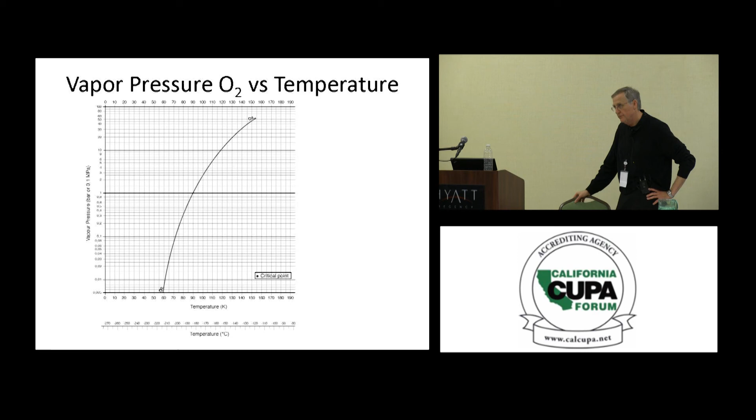Somebody asked him, well, how do you feel about this risk? And he says, well, obviously, if they have a problem over there, it's going to fry the school, we're all going to be dead. But we were sitting there going, really? No, everybody just accepted that with no qualms at all? Yeah, no follow-up questions even. We would not have predicted that.

Well, in the discussion this afternoon on ammonia I can throw in a little story, but I'll tell it now as well, in terms of talking about risk decisions made at public meetings or internally related to children.

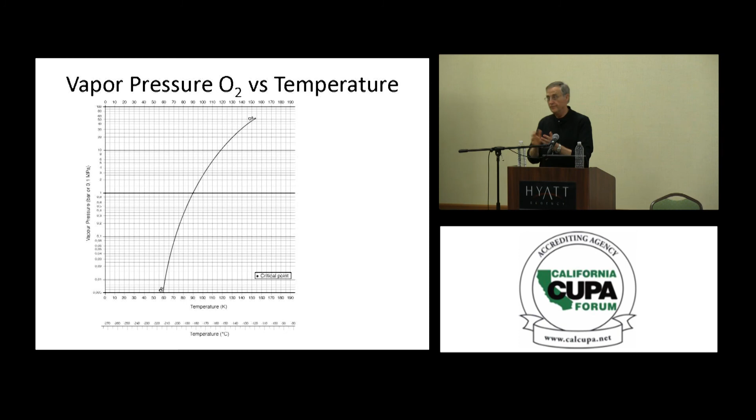One of the decisions I was involved with at one time was to locate a 500-child daycare center. During evaluation of the site, it was found there were a number of ammonia refrigeration systems in fairly close proximity, within a quarter mile or less, very close, within the impact zone if there were to be a release. So I was involved in overseeing a lot of consequence analysis work, looking at what might go wrong, looking at the probabilities, looking at the industry data for the last 20 or 30 years, searching the literature, looking at all the information.

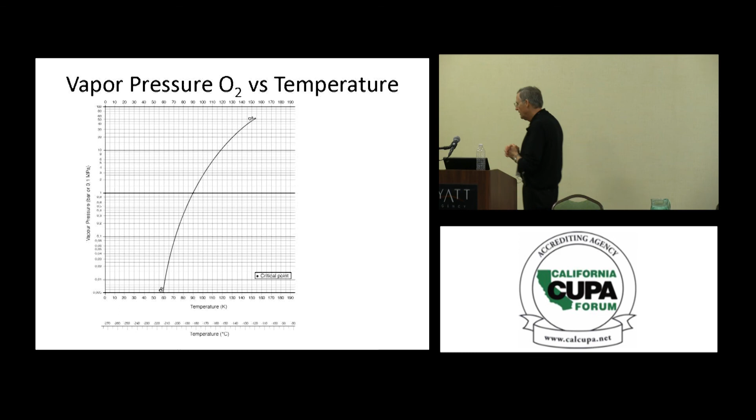So we made the presentation, made the assessment, and unfortunately the property had already been purchased, a number of things were already in place, and the ball was already rolling. So the decision was made to proceed, but we decided to put in mitigation measures.

What if, even though the probability is low? We did all the windrose analysis, looked at what percent of the time during the period of occupancy the wind would be blowing in the correct direction to cause an impact. Even though we thought the risk was very low, we had perimeter detectors for ammonia put in place. We had a shelter-in-place plan written and all the childcare staff trained on it. We also pushed to have the local CUPA lean on the people operating those systems to put in place an emergency notification.

So everything's going along fine. I had the meetings, we talked about probabilities and how low the probability was of these events, but we've got mitigating safeguards in place. Within less than 6 months after that childcare center opened, there was a major release of ammonia.

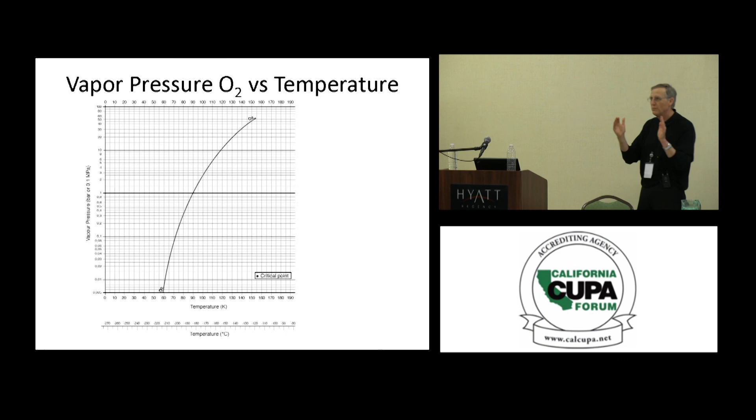The company that released it failed to follow their emergency plan, give adequate notifications that it had happened. Luckily it happened around 5 or 6 in the morning before anyone was there. Of course all the alarms went off. While my business as an engineer is preventing loss of containment, I'm practical enough to know I've got to have mitigating safeguards in case we lose containment. And that's a perfect example: a low probability event that should happen once in decades happened within 6 months.